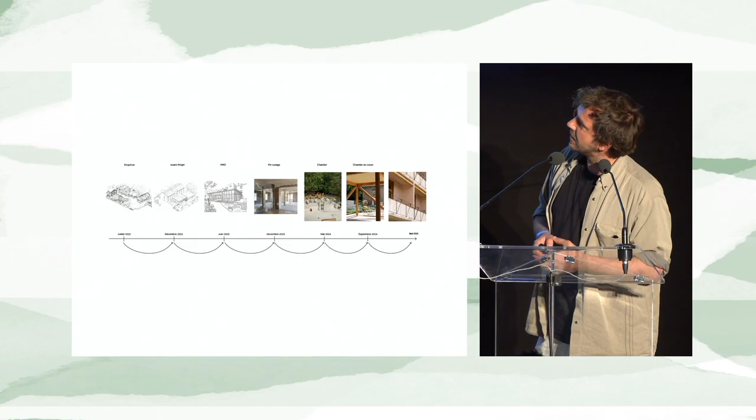Today I'll organize the presentation by looking at certain topics, or certain battles we took on. Because in the reality of renovating the clinic, of course we couldn't do everything again. We had to compromise and try to fit this into a different economic logic.

To go slightly over the program, just so you understand what's happening inside: we talked about temporary housing for students and seasonal workers. I'm just going to take one, at least I can see.

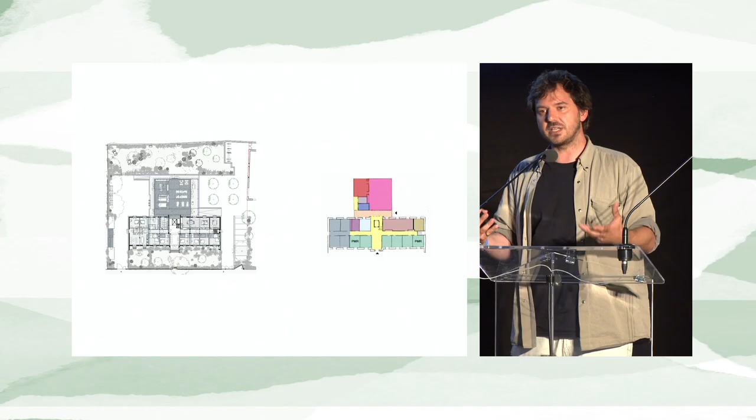The ground floor, footprint, and organization of the existing clinic was actually perfect to be transformed into housing. It followed a kind of rigid system. We had patients, now we have inhabitants — changes a bit, but in the end we're all patients of the earth.

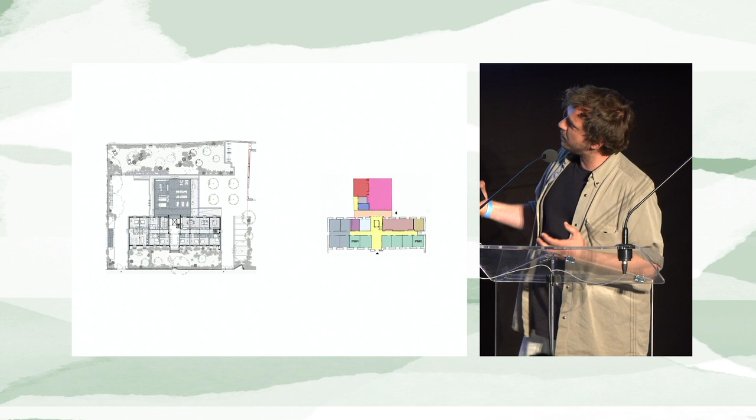At the front building, we slightly changed the access points. Originally there was a central axis; we turned it to the sides. We left the logistical axis on one side and, on the right, an axis more for visitors or inhabitants. The front side was kept as a kind of green buffer zone because, you know, students coming all together — we didn't want to disturb the residential area too much.

So this became much more of a secondary garden place. In the front building we had the night program, let's say, the rooms.

At the back building, the old surgery rooms, we focused really on the day activities, meaning the refectory and the common areas. They were organized around this kind of square-type situation, or arrival zone.

As I mentioned, this pavilion at the back, the old surgery, we wanted to keep it. So in the initial plans, before starting the — I think in French you say curation. I don't know if it exists in English, curation, but I like the idea.

So we curated the demolition, because we didn't demolish everything — we really decided what to demolish. We didn't want to demolish the surgery, but in the 90s we were great with glue. We loved glue, so everything was glued to everything.

So basically, in the demolition process, we detached all structural elements, and it was impossible for us to keep the original structure of it. We decided, though, to keep the footprint, so the current refectory and common areas.

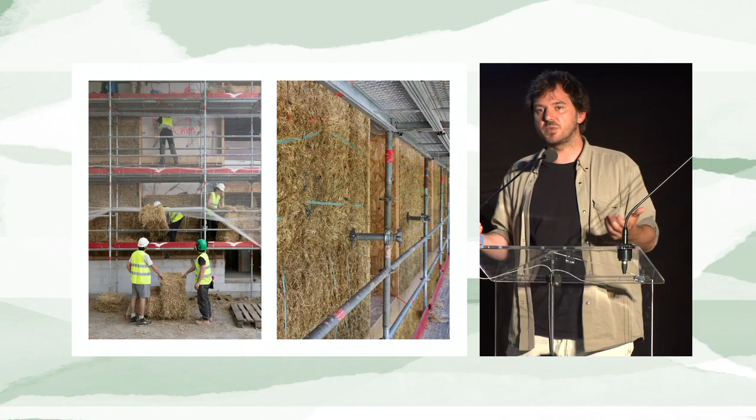Because again, as we need clients, we need, as architects, we need contractors. We can have ambitions, but if there's nobody who can translate them also on a construction site, little advance happens. And so an amazing team which was able to wrap the whole clinic in this kind of material.

On top of that material, of course, the straw bales are not visible to everything, and we had this morning many presentations in which the potential of straw bale and rice straw bale was brought up. It's not efficient finishing with plaster, rather with a hot mix technique.

Before entering the hot mix technique, the roof itself is, of course, the tile. It was insulated, the tiles were taken down, cleaned, reused for the ones that were able to be reused.

I would love to tell you we took the tiles down, we crushed them and used them straight away, but it's not possible, and it's a hard one to make work within the French legislation. But it is crushed bricks and tiles which were used, just not ours, but of others. Doing that on site would create so much dust that you would have issues.

Once material goes out of a construction site, it's understood as waste, and it enters other normations. So weirdly, I think stuff still should change around that. But in any case, the crushed bricks and crushed tiles were part of a lime hot mix, which came on top of the full rice straw bale insulation.

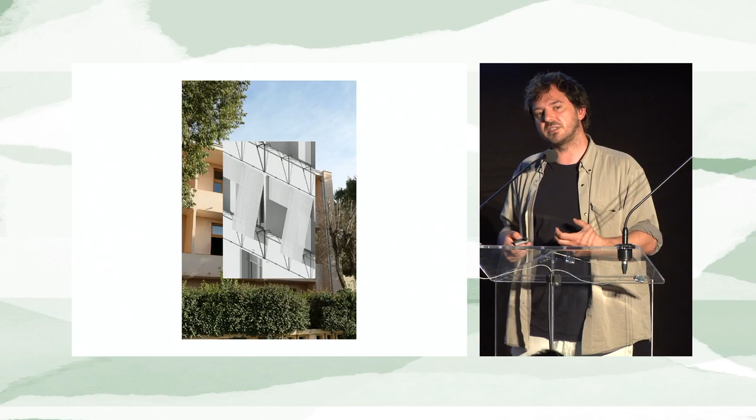So we went through different systems in order to strengthen the existing balconies with a kind of exoskeleton, but at the same time something that would allow protection from the sun and still allow ventilation under it. That's a detail, I'm not showing the full building, that you have to go and look for yourself.

But in any case, these are kind of elements, an exoskeleton, which beautifully also creates an interesting dynamic at the front side. It leaves the existing building to be shown, although there's a kind of added element that creates shadow and gets some more life into it.

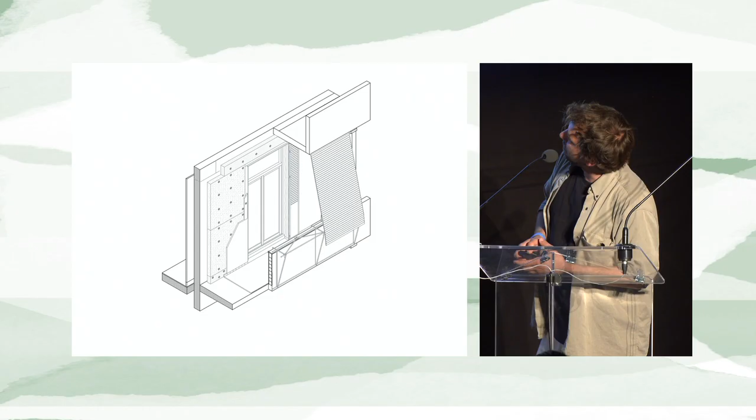And then in a very DIY way, there's a kind of shading mechanism. We're not too fond of too many technical things. And I'm not going to go into this one, maybe yes, because when we talk about supply chains, we talk about a variety of products.

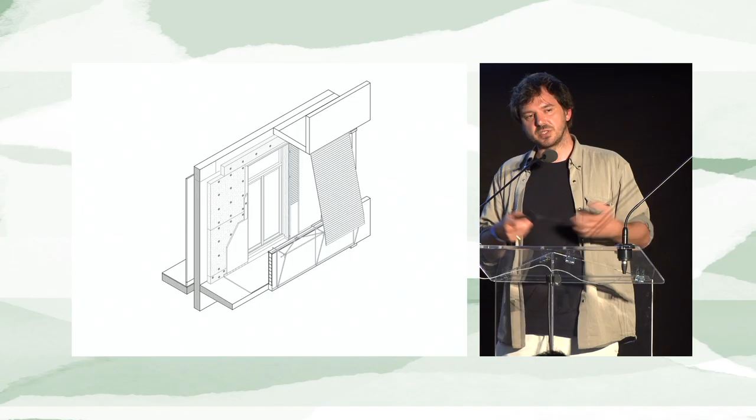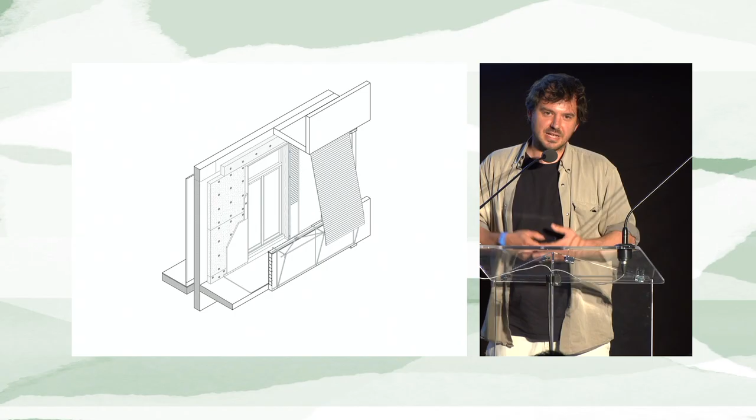Rice straw bale insulation exists today, the tools for it exist today with the farmers. They make blocks, 35 by so on, and that's what they can put on sale. But the more projects that try to use this material, the more the supply chain will adapt to that kind of request.

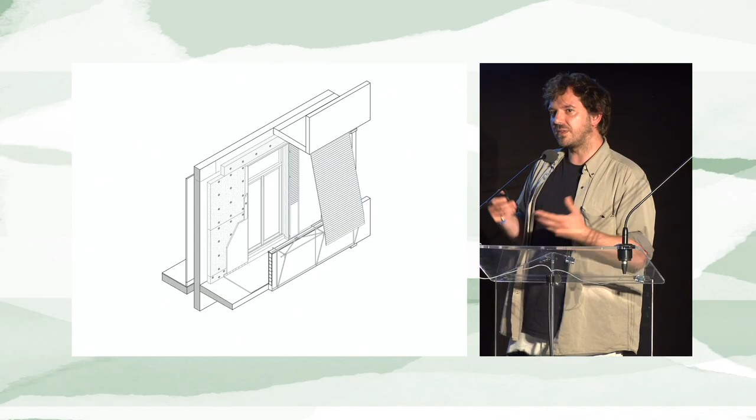35 centimeters is very hard to insulate your little apartment in Paris with, because you go from 20 square meters to 10. So I think there's a kind of interest and development, what you can see with

entrepreneurs, I would say, in the development of new tools to allow also the use of, in this case, not rice straw but straw, to make insulation elements which are smaller than 35, because to do that you need new machines, which we don't have yet. We've developed very fast cars, but not machines who can press straw into elements smaller than 35.

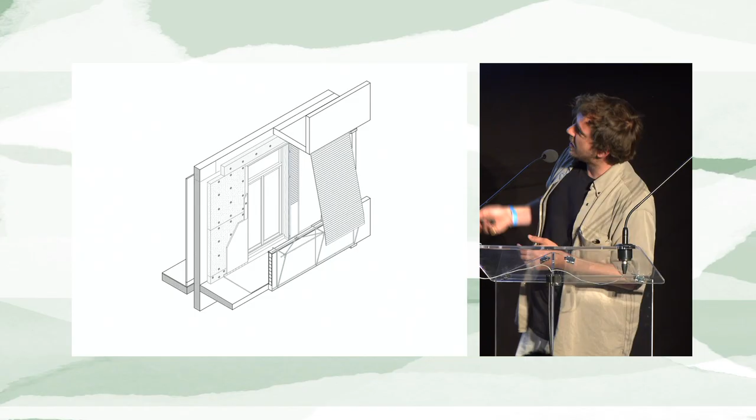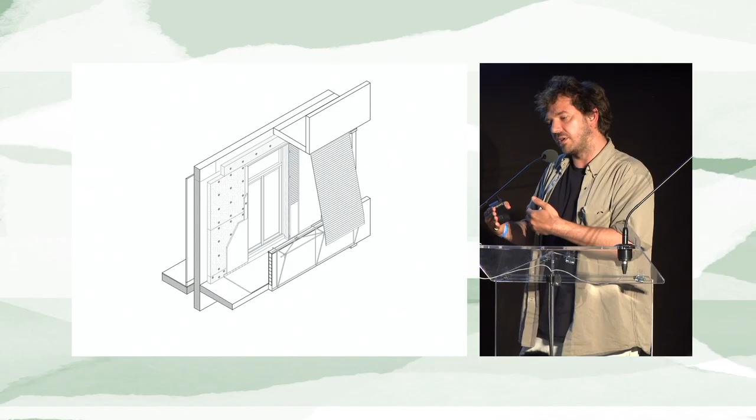But here we have some developments happening in France, in the north of France, an industry which has a big sewing machine, and it's creating these big tatamis, basically, which can be used to insulate, and we did that at the south facade with smaller margins, or at least a smaller thickness, which allowed the balcony, of course, still to be used.

Small details, but when you enter the reality of a project, these become actually the milestones of a decision you can make. Is there a tool? Is there a machine? Yes or no? So it's very important to make more and more referential projects like these.

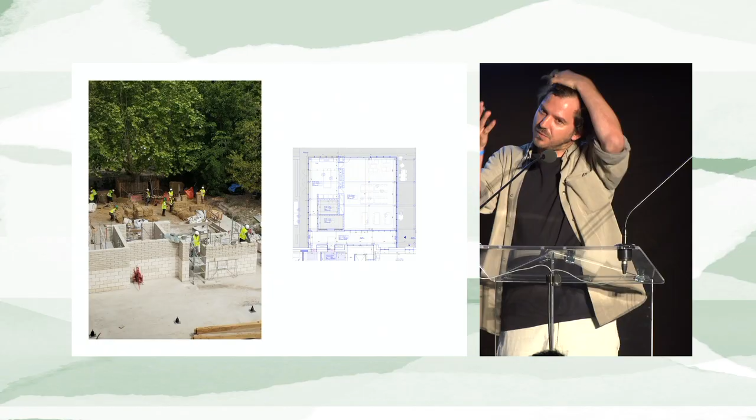Now, from the front building, we enter the back building being the pavilion. I think one of my colleagues mentioned the fact that we had an overproduction of the blocks here in lot 8, so it was quite logical to reuse these blocks. And the line we can see there, just to explain slightly before the programs, there's a kind of core within the pavilion which is completely geo-based.

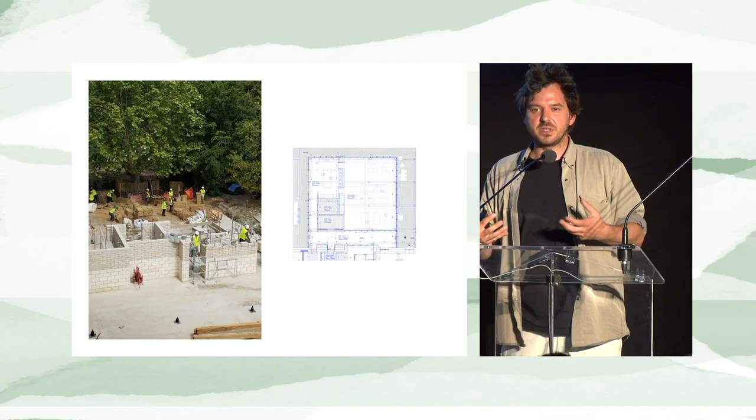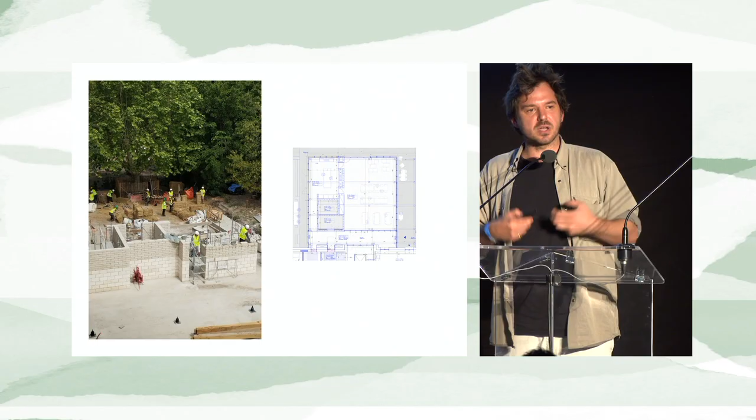So we're talking earth blocks and we're talking stone blocks. Within that block, we have all kinds of technical aspects, from the buanderie to the kitchen and all these kinds of more technical spaces. Outside, it's a larger space.

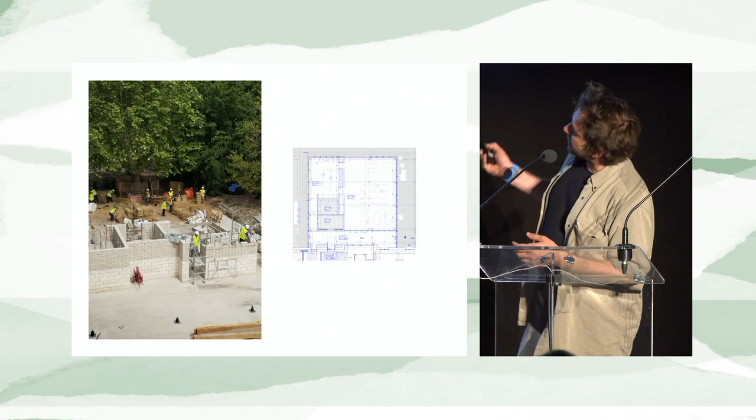And a bigger work was taken in the research of local trees that could potentially, or could become the structure around the core.

We have chestnut for all the windows. We have oak for the structural beams within the building. Iris, correct me if I'm wrong, I think we have six columns of cypress outside. And we have pin d'Alep, Aleppo pine, and maritime pine for the inside. So each kind of specific tree type had its use within the building, because not each tree type, of course, can be used for the same reasons.

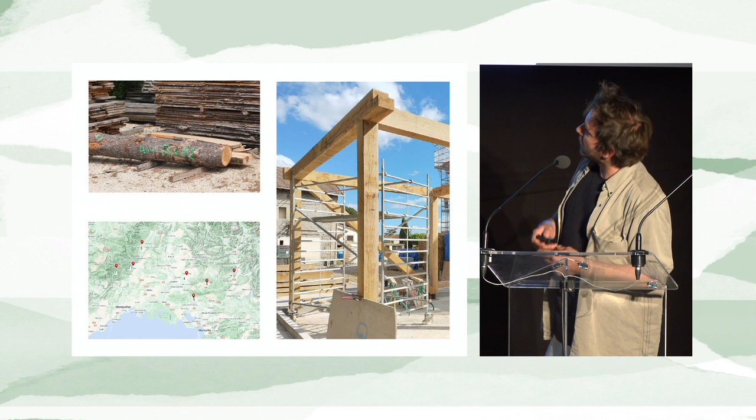Quite a work in convincing certain forestries, looking for these things, because this is not something you go to the market and say, well, this is the kind of set of trees I need. So today there's not a real supply chain focusing on these kind of tree types for construction. So there's slightly more investment of time and energy that has to go into linking up these people just to make sure you get the material inside.

And this is a bit how these two structures then come together, the kind of existing building and the pavilion, which you will all see very soon. Last but not least, I'm almost done.

We were talking about reusing the whole structure of the clinic as much as possible. We talked about the walls, and sadly enough, the walls within the front building were also hard to reuse, because over time a lot of finishings were added, and these finishings were glued, so by taking them off, parts of the internal walls broke down, and we had to take these down too.

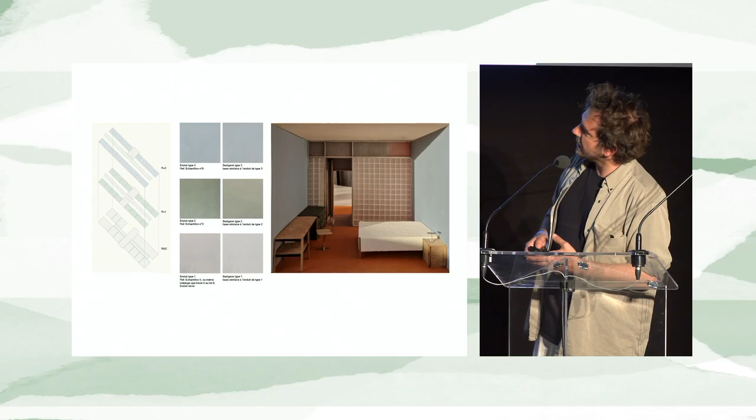As we took them down, Rashid and Tanzi explained nicely this morning, we created new walls as needed, and wished to finish them all with earth plaster to have more inertia within the building. We set out a kind of color scheme in order to place certain types of colors in certain types of spaces, which were more prone to sun, others not.

Therefore, the higher you went, the darker the earth plaster. And this is the second floor, we have more greenish rooms. All the hallways were much lighter because you had less light in.

And here actually you see the pin d'Alep, which is a beautiful textured wood that is not often used. We should give more attention to it.

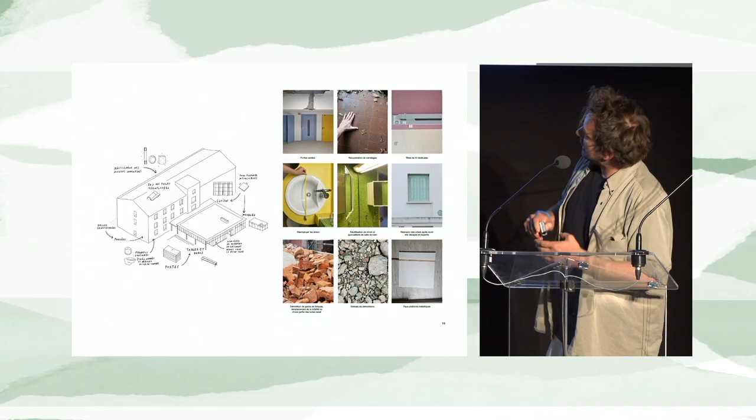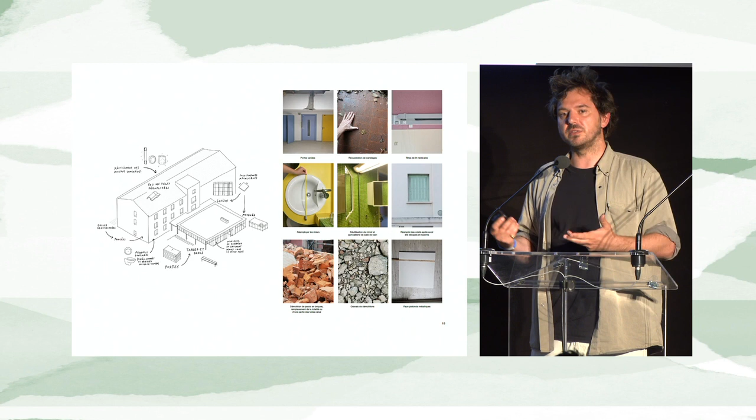When we entered the curation and demolition phase, there was a set of materials that we could and wanted to recuperate. Some of them we managed, some others not. And what is just beautiful walking throughout this building is that you recognize certain elements whose story was transformed and adapted to its new function.

Certain examples are the tiles outside, which were used for some paving. When polished, they became beautiful again and were actually used in the interior.

We have all the lowered ceilings, metal lowered ceilings, which were used for closets, but also doors, as you can see here in the sanitary. But also in furniture, because certain doors, certain elements, were very useful to inhabit the space.

Combined with certain kinds of elements. I took these photos yesterday morning, they just arrived.

I think a great work was done by Johanna and Grégoire of our team, who really tried to look and understand what was possible to be made with these leftovers.

And even small stories, I think it's always nice and fun to have these ones. These are the old lights, which became a family of objects in the rooms, reusing also just excavated earth.

But also while doing the construction site, you're actually producing additional waste, these are offcuts and so on and so forth. And from those, a selection of other furniture came to be.

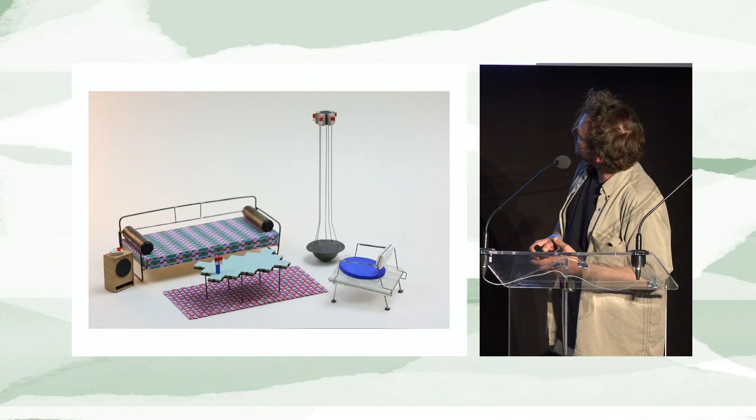But also, even when we order materials, contractors always add a 10% margin, you never know. So we had a small percentage of these blocks, which were then reused for furniture. And so you have a family of one-shots that inhabit the spaces of Paoli.

And that's it. I invite you to go and visit it one day, or stay over. And thank you so much.

Thank you, Laurens, for this amazing presentation. It seems really easy for you to pull out such a project, whereas we know how much work and effort you put into it. So again, thank you for presenting us with ways in which architecture can try to face some of the challenges that we're going to get. It's done in a way that is extremely beautiful, and that's really a joy to see.